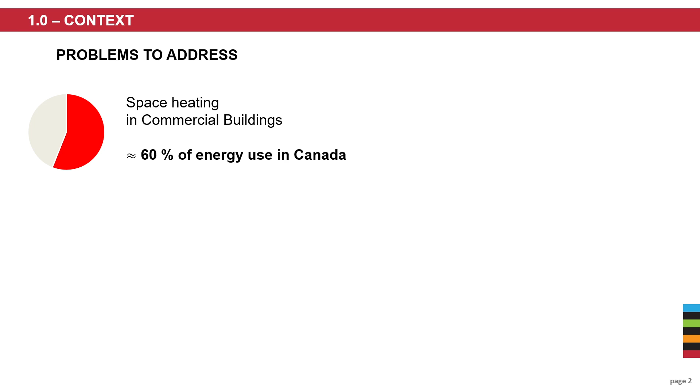Hello everybody, I'm Giulio Tonellato and we talk today about control strategies for ground source heat pumps using standing column wells. One of the main problems to address when talking about global warming is the energy use, and in commercial buildings in Canada about 60% of energy used is used for space heating. To reduce it, the most conventional renovation solution is to substitute boilers with ground source heat pumps that use closed loop boreholes, but this costs a lot of money just for the drilling.

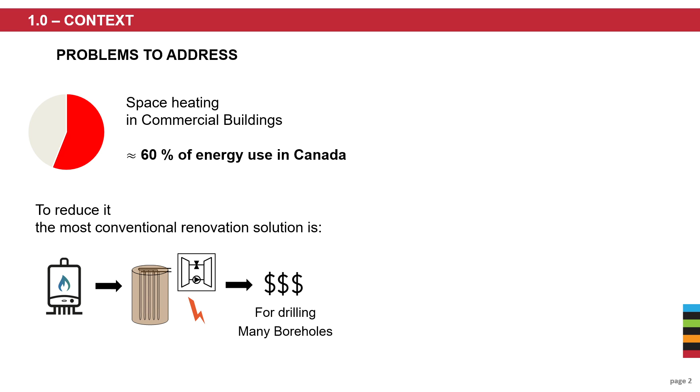An alternative solution is to use standing column wells. This system draws groundwater directly from the ground and reinjects it in the same boreholes and also in other boreholes, thus enhancing the heat transmission and requiring 5 times fewer boreholes than conventional systems. But there are still some obstacles to overcome: the lack of easy to use design tools and peak loads management. My work will focus on this last problem.

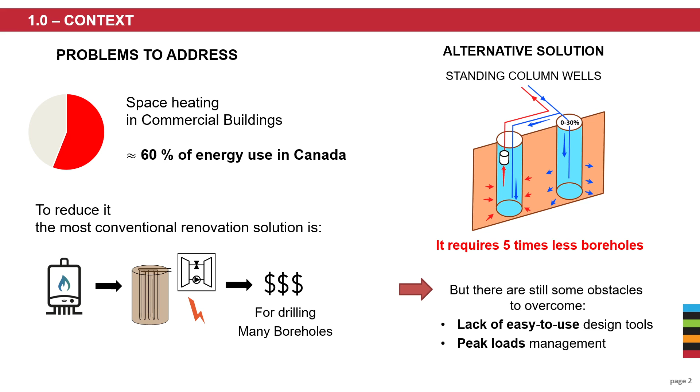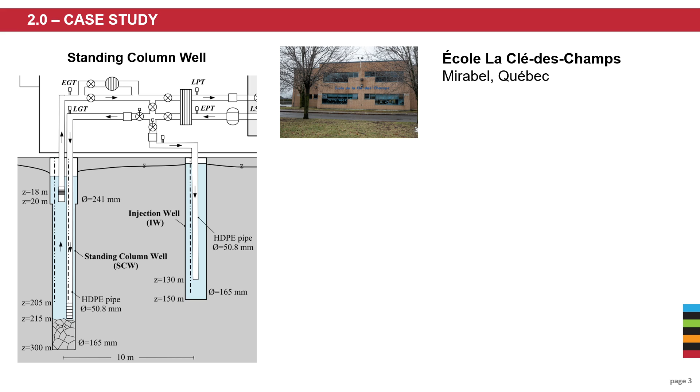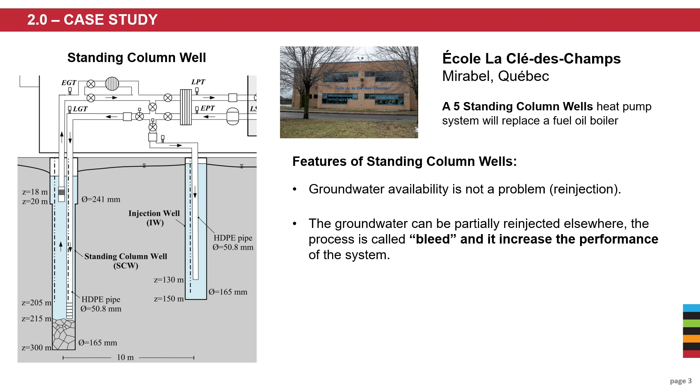The case study building is the École La Clé des Champs in Mirabel, Quebec. A 5 standing column wells heat pump system will replace a fuel oil boiler. The main feature of standing column wells is that the groundwater availability is not a problem anymore because the groundwater is reinjected also in the same borehole, and it is also possible to reinject part of it in another well called injection well. This increases the performance and is called bleed.

But we must take care of the risk of groundwater freezing. A water heater is placed just before the heat exchanger as a safety measure, but its use should be avoided. You can see here the water heater in the image.

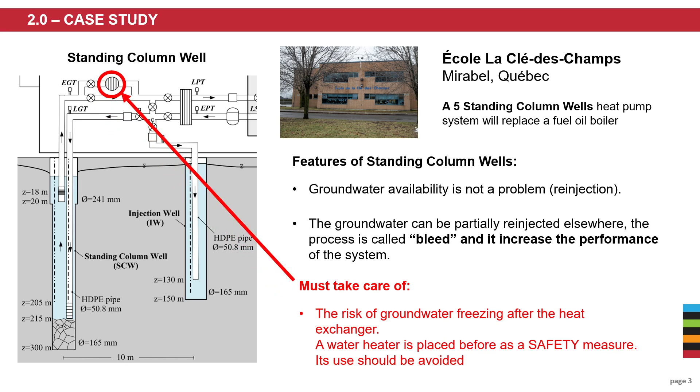My main research objective is to reduce electricity peaks, thus operating peak shaving. Here you can see in the image, for example, that you can pass from the red curve to the blue curve, operating peak shaving. But how can you do it?

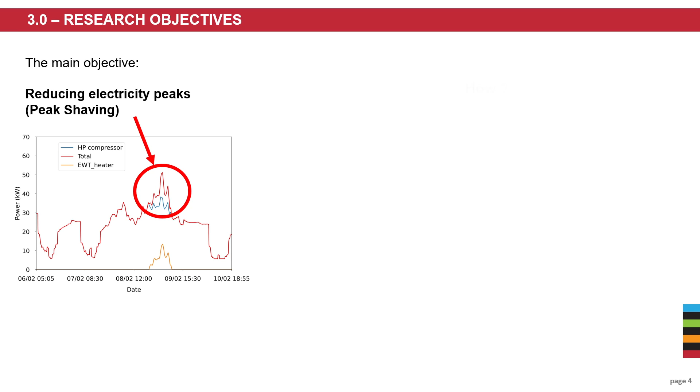Anticipating the peaks by raising bleed to warm up the well, as already mentioned, by preheating the building, thus shifting the loads before the peaks, or by preheating the water storage tank, thus also operating load shifting. The benefits are to reduce pressure on the grid and reduce capital and operations costs. How to anticipate the peaks? This is achievable with predictive control.

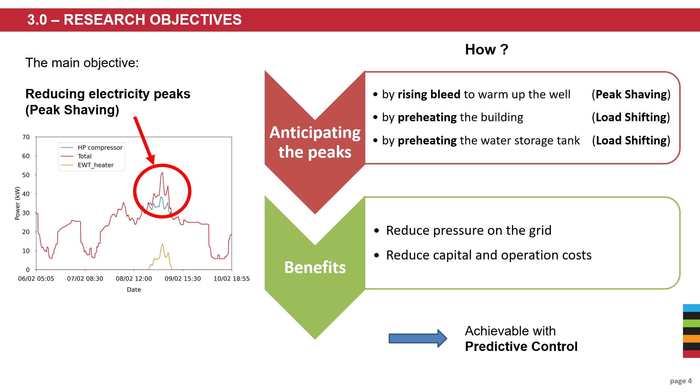My work is divided in 2 parts. The first part is mostly focused on modeling. My approach to the model is to divide it in 3 parts. One is about the 3D energy modeling of the school that is made in TRNSYS. Another model is the heating, ventilation and air conditioning system, also in TRNSYS. And then the ground response is modeled in MATLAB. MATLAB is co-simulated with TRNSYS.

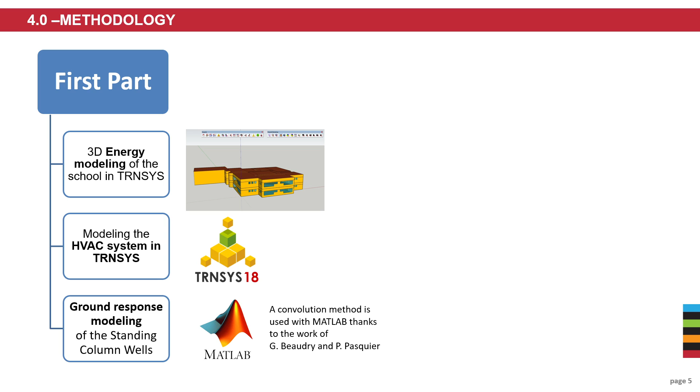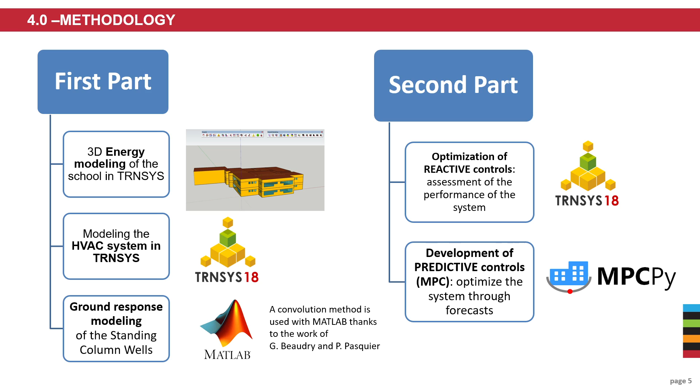The second part of my work is about controls. At first, I will use reactive controls to assess the performance of the system and to have a baseline. Afterwards, I will develop predictive controls. This kind of controls allows to optimize the system through weather forecasts.

I still do not have complete results, so I can show you here only preliminary results. Here you can see the validation of the building energy model. I reconstructed the real energy use through energy bills of both the fuel oil and the electricity boiler, and I compared it with my TRNSYS prediction.